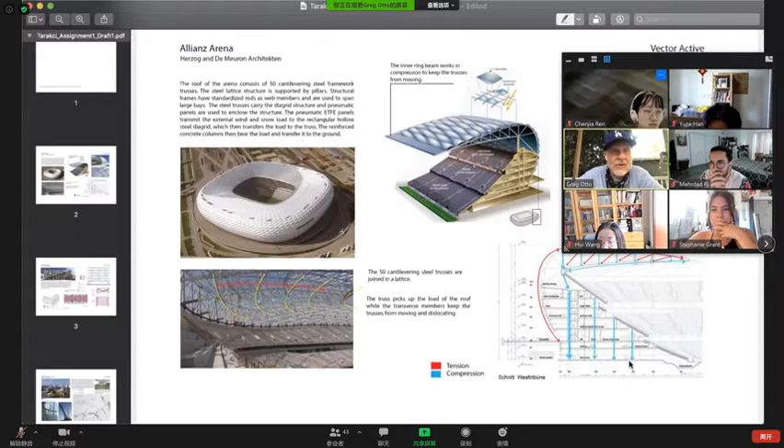Sorry about that. So this is, I think, really well done. I was looking at this right before class. Description of the structure, very clear from the written piece to the corner diagram that you've got a truss, you've got a cantilevered truss.

You see the top chord in tension. It wants to rotate around this pivot, which is effectively a ring beam that goes all the way around. And then probably what's missing in this diagram is the continuation of the trussing on this back piece to get to this back chord that wraps around. That's probably a missing piece, but nonetheless, very clear in terms of how the loads transfer into the truss.

What's also nice about this is the connection that there is circular behavior in this whole structural system, and that's represented in the yellow lines. Those rings effectively tie together. So if the tip of the truss were to deflect, and if the diagram was presented such that the tip would deflect, those hoops, the yellow lines, would effectively restrict the deflection.

So it effectively tightens up the roof structure. And we'll talk about that when we get into the next section and talk about football stadiums, that the hooping action or the ring action is a really important phenomenon that effectively helps stiffen a roof.

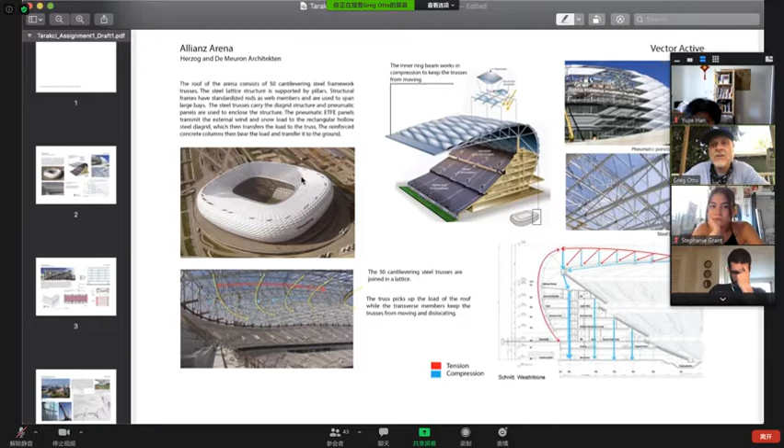So at the end they ended up with a much shallower structure. But the definition here is correct, it is a vector active structure. So that I thought that was very good.

There was another one that I wanted to show. Go ahead, please let Dagdir inside. Hang on, I see him. There he goes, thank you. Yep. Man, it does not like to pick up.

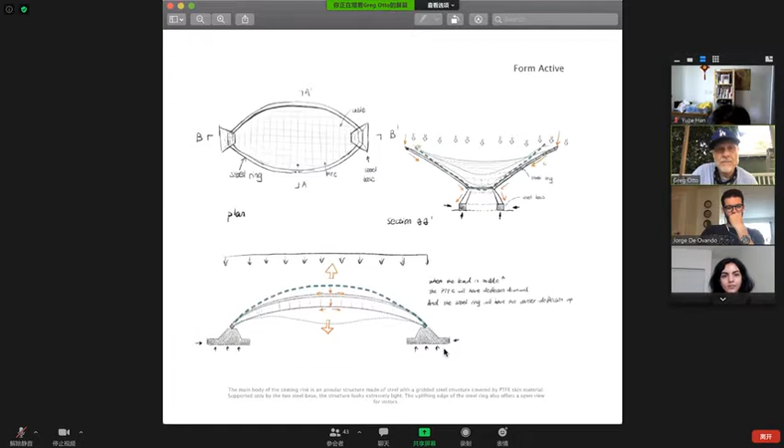All right, so does anybody want to show their project? It's the perfect opportunity to put your work up on display, and we can talk about it and see how on point or off point you are. Hopefully you're on point, but if not, this is a perfect time to catch it and correct it, because I'm going to give you one more week to touch it up based upon the work I've showed. Anybody want to give it a shot, or do you want me to call on somebody?

I can show my first project, Greg, if it's possible. Yeah, perfect, fire away. I don't know if it's very draft, but I cannot share screen from here. Only you can. Only I can. Oh, why is that? If you click the three dots configuration, you have to allow the share screen button. All participants. Perfect.

Okay, there you go. Yeah. Oh yeah. Okay. I don't know why it's not showing. No, oh. No, sorry, I don't know why it's not. The file is not in my folder. I should have to wait. Can someone else go? Yeah, who wants to go?

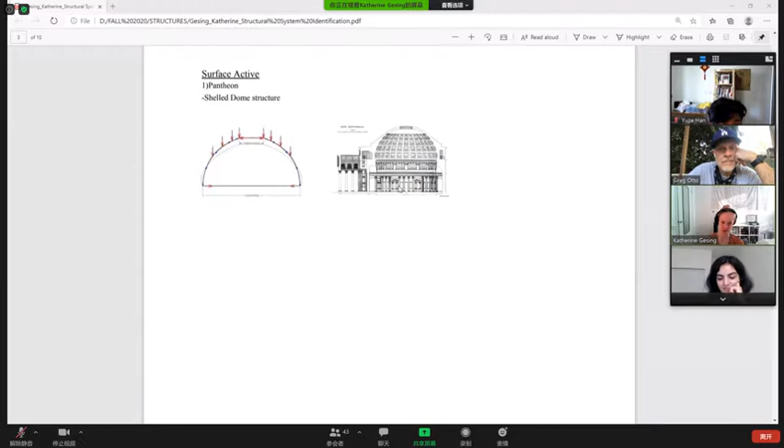I'm just trying to find one, we can just do the Pantheon, because that is a basic thing. As soon as I can share my screen... So this is, I was just looking at the Pantheon as a surface active structure, because it's a shell dome structure, one of the easier ones to comprehend for me.

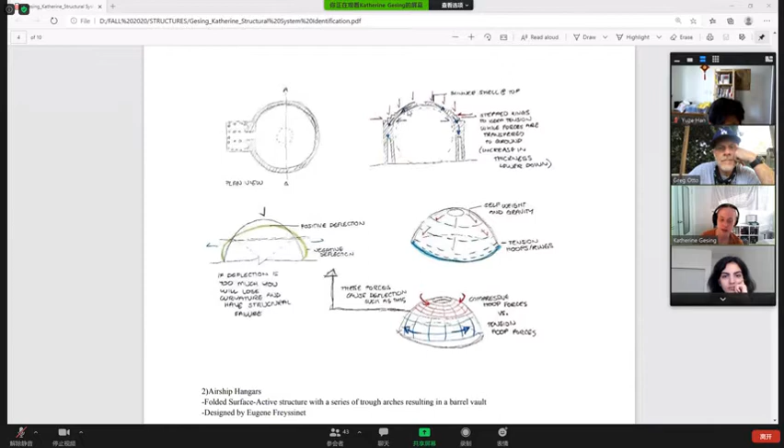And I think it's nice because the way the dome is created, it gets thinner towards the top, and the different aggregate used in the concrete is also different towards the top. But in addition, they have these stepped tension rings on the outside that are kind of like stairs, and they do that because within the dome, you get tension forces towards the bottom while it compresses at the top, and so the deflection would kind of smush it like a loaf of bread.

And since it is surface active, if the deflection is too much or you have too many external forces, it would lose the curvature and you'd have a structural failure. So yeah, I think this is great.

I think my comment would be you did exactly what I warned not to do, which is don't draw small. Because I think your explanation is actually spot on. It is absolutely 100% surface active. Your description of compression and tension in the zones is spot on, that yes, the forces build up under gravity load as you work your way down the dome, as the rings, the loading is increasing incrementally, and so in a way you've captured all of the fundamental ideas of this, but your illustrations are so small. You're tentative, you're scared to do it, but you were 100% right.

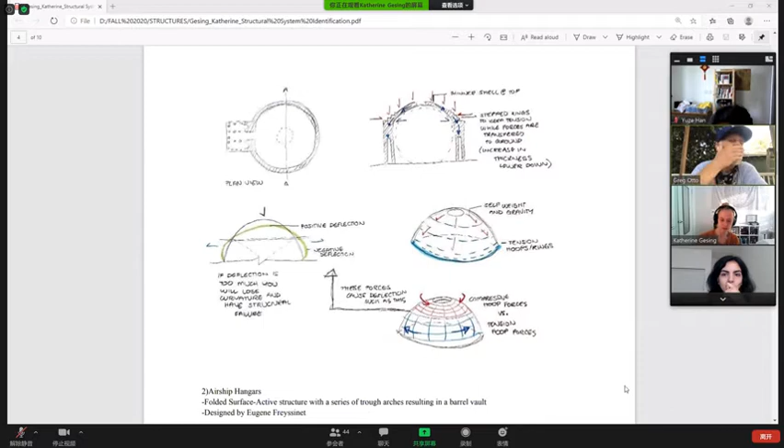And so I would encourage you to enlarge and be more confident with the sketching, because it'll also help, when it gets to more complex things, you'll become more comfortable in diagnosing what the structural system is. Okay, thank you. Austin, you want to go? Sure, I can go.

I don't know what project... I guess we'll just pick the one you're proud of, or the one you think is right. Well, I'm pretty sure this one's right. We'll go with the Beinecke library.

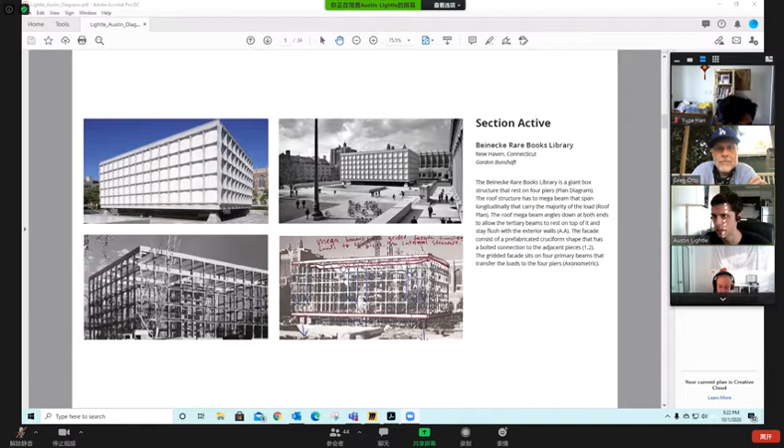It's basically a giant box structure that sits on 4 piers. It has 4 perimeter beams at the top and bottom, and then 2 mega beams that dip down in section running across the middle, so it's really all resting on these 4 piers. Looking at the roof, those 2 large beams go across the middle and drop down in section, with tertiary beams sitting on top.

The facade is made up of a prefabricated cruciform shape with pin connections that they just dropped and slid into place.

Yep, so there's a lot of things going on here. This is a great project. You're 100% correct, section active. I would say you have small sketch disease as well.

The niftiness of this is twofold. One, it's a table—it's got 4 supports in the corner, with this big table frame system that effectively creates new terra firma, which is new ground, and that's what lifts it off the ground. Then the perimeter exoskeleton system is effectively these structural spars, which is your diagram 1.2. It's cool that you caught that it's a pin connection.

If you remember, we talked a lot about the Vierendeel truss, and this is really a Vierendeel truss. What this is noting is you have rigidity at the node where a vertical and horizontal come together, and because of flexure, you get zero moment at the pin—that's the diagram. So you got there. You probably need that diagram, but you're spot on capturing the core details of this building.

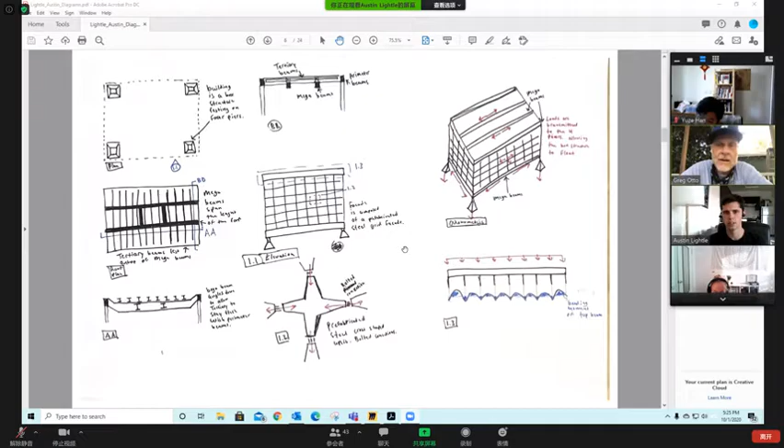So, nice one. Okay, who else wants to give it a shot? I mean, the one thing I'd say is you're missing a narrative.

Remember, I'm all for hand sketches, and I think SciArc is in desperate need of having lots of sketching, but I would also challenge you to work on your graphics and your presentation. This is a formal assignment—I'd encourage you to see this as something that also would go in your portfolio, doing case studies and evaluations, because when you get into practice, this is a big deal.

I remember speaking to Dan Seibert, a senior partner at Foster and Partners, who said that's a technique very few architecture students have these days—the ability to take projects and dissect them to understand what's going on. So I encourage you to have that in your portfolio going forward, and be thinking about these deliverables as something you're going to package up. It's important to have your studio work, but it's also important to show that you own your process, and that you have rigor around your process to develop architecture.

Okay, all right. And I have my file already, Greg. Can I go? Awesome, yep, fire away. And I have a doubt regarding the systems.

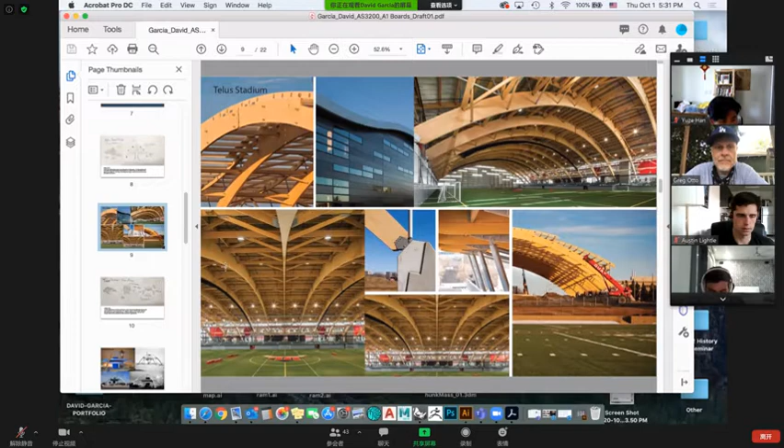Awesome, okay, what do you got here? Yeah, so this beautiful structure, by the way. Love this one, stadium, huge timber structure. This one is, of course, form active. Why? So normally a form active is a tensile structure. What makes this one unique?

It's an arch, right? Yeah, okay. So I kind of have some of the details on it. It's kind of these major arches, and then aligned with these minor beams that go across it in plan. So I kind of tried to show that the beam goes across to these anchor points and then forms like this egg form with compression inside and tension on the outside.

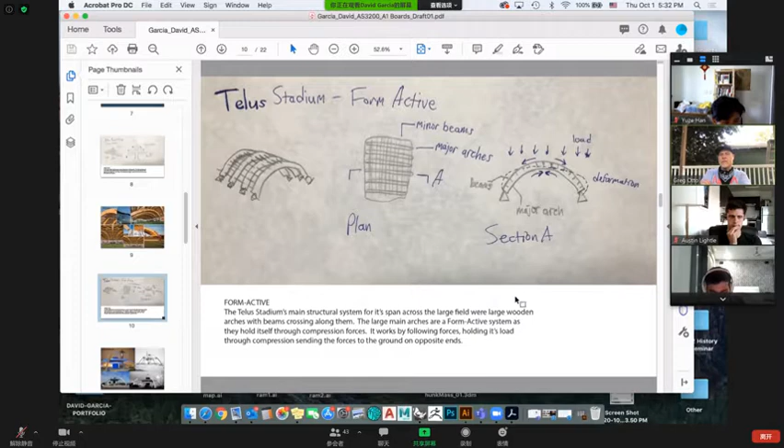One of the things about arches, and the thing you always have to be really careful about, is there's an enormous amount of force that comes out of these things because you're effectively collecting gravity forces and lateral forces, and these are getting translated effectively into compression, into the curvature, and transferring down through the arch, through the geometry, and each incremental step that compressive force increases until it hits its support.

So in your case, you're showing pinned, and that is correct. It's a pinned arch, which means at the end you get a horizontal thrust and you get a vertical thrust. Your foundation has to resist, has to push upward, and it has to push inboard, from both sides inboard. And so lots of times, in all cases, that results in very large foundations because you have very large thrust forces. And in this particular case, this is a very long span structure, that can become very, very costly.

Later in the semester, I'll talk about a project I did with Shigeru Ban, in which it's an art structure - let's just say it's a surface active structure, but the arching action, I also ended up with large thrust forces, and you can tie it. So in this particular case, if I actually took a cable and ran it under the field and tied one foundation to the other...

I could actually reduce my foundation requirements because I've tied the arch, because my force coming out of the arch should be equal and opposite. So if I tie them, if they're pushing out, I tie them so that I pull them together, I have an equal opposing force. And so that tie, the tension could be really huge, but I've basically relieved myself of having to deal with the horizontal thrust of the arch, and now I'm only dealing with the gravity component. Does that make sense to everybody?

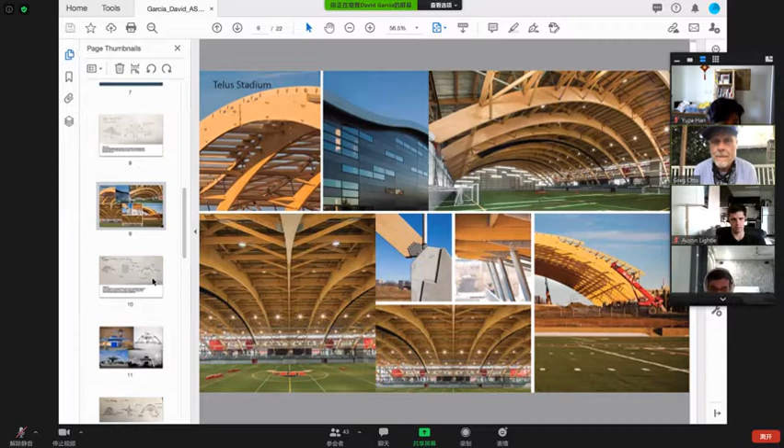Everybody with me? Yes. That's a pretty cool narrative to understand.

Okay, so I think again you probably too suffer from tiny sketch - you're missing reactions. But I think it's a great structure, and I think you have good stuff here.

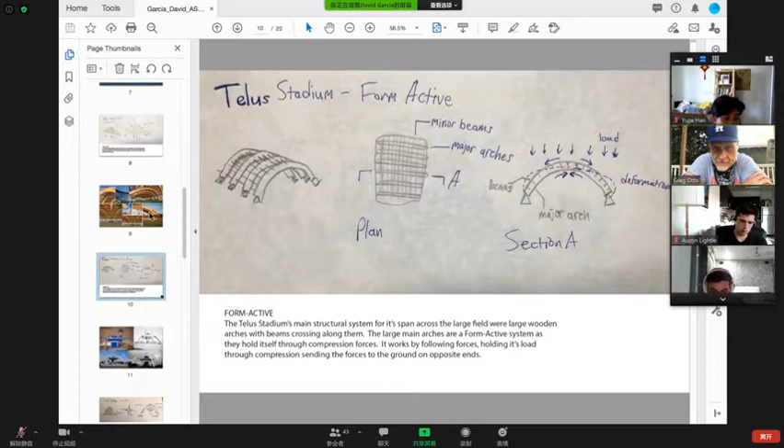Yeah, okay, okay. All right, how about we get, let's see - how about Jordan?

I only have pictures of my sketchbook. Do you want me to share that? Yeah, let's do it. Okay.

So I definitely did not do as much as everyone up until this point. But for my section active category, I did the Farnsworth House, the Glass House, and the New National Gallery by Mies, and also Philip Johnson.

Yep, so let's just talk about the Farnsworth House, right? You probably need images of the Farnsworth House as part of your package. Going back to the conversation of the Bauhaus and industrialized construction, and particularly industrialization around common components, like I-beams, etc.

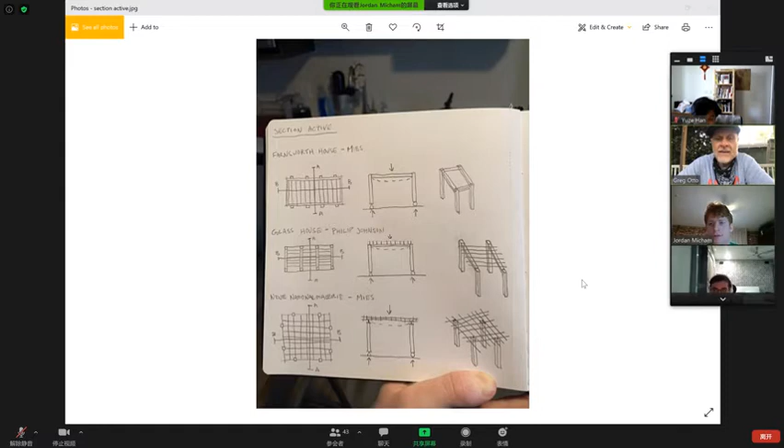Okay, yeah sure. Okay, let's see. How about Kate? Sure. Okay.

Okay, here's one that I have as form active. It's basically a glass structure that's held together by cables, and it's connected onto the existing building with the cables and on top of tubular columns.

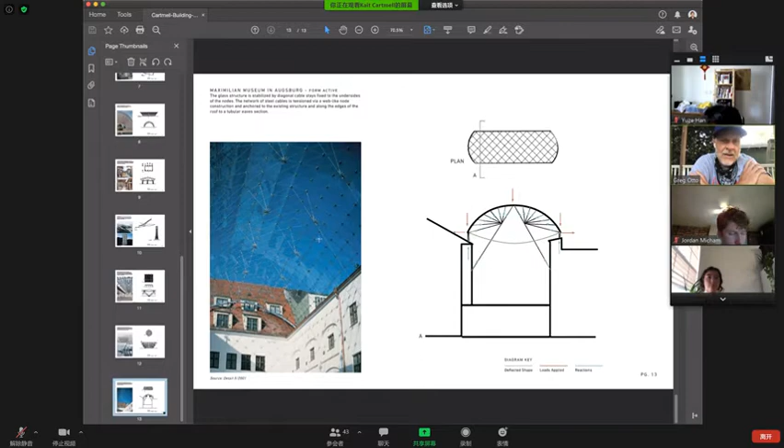Yeah, this one's an interesting one. It's a barrel vault, and I would generally agree with you that it's form active, with the exception that if that plane of glass did not exist... so if you blow up the plane of glass as a picture, you'll see there's X bracing in there — see how it's crisscrossing? See how there's X's in there?

So really, at the end of the day — and this is where you and I are going to argue, and it'll be a good argument — there ultimately is a plane of action happening, and therefore it makes it surface active. But if you do have the diagram, it is correct — the structure would fail because it literally is a bit too flat without the cable system underneath, which basically makes it a cable arch.

So there is an element of form activity in this thing, but if you only relied on form active, it would fail because you need the surface plane, and therefore it really is surface active. The giveaway — sorry for my dog — the giveaway is the X bracing between the nodes that would make it surface active, because it wants to be a shell, and that glass really is operating as a shell.

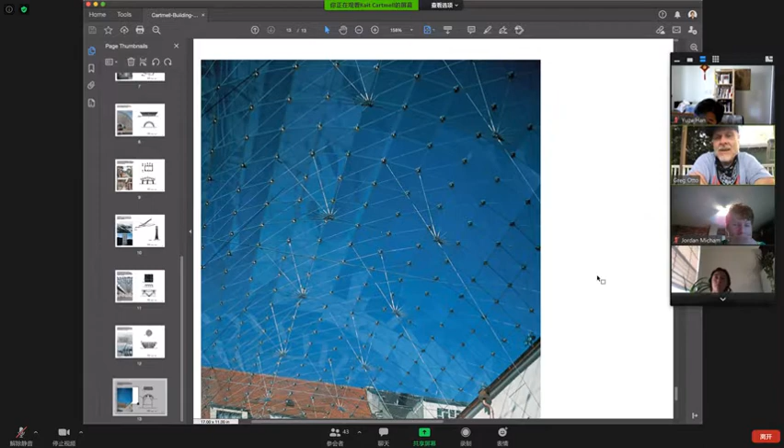Okay, make sense? Yeah, beautiful project. But this diagram is correct though. It's just — yeah, the diagram is correct.

You're effectively — so if you were to press on this thing, right, and just think about this — these are really beautiful structures. If I press on this thing, the whole thing wants to splay out, I get a thrust action out of the whole thing. But because of the cables, it prevents it from really flattening out, in a way that — the best analogy is it operates like a bicycle wheel, if that makes sense.

That's effectively what this is. It's not a complete bicycle wheel, but at the end of the day, because of how it's laid out, it works exactly like a bicycle wheel — like the spokes would never really like to be in compression. If you put the spokes in true compression, a bicycle wheel would fail.

But because they're all in tension, the whole load, because it's in a ring, is always redistributing. Even though you're sitting on it and transferring a compressive force, you're trying to smash the wheel and the ground's trying to push back up at you. Because you have a ring of tension behavior, the spoke that would be in compression can't be, because it doesn't have the capacity, and it redistributes through the system so that the spokes resisting tension actually carry the load. Does that make sense?

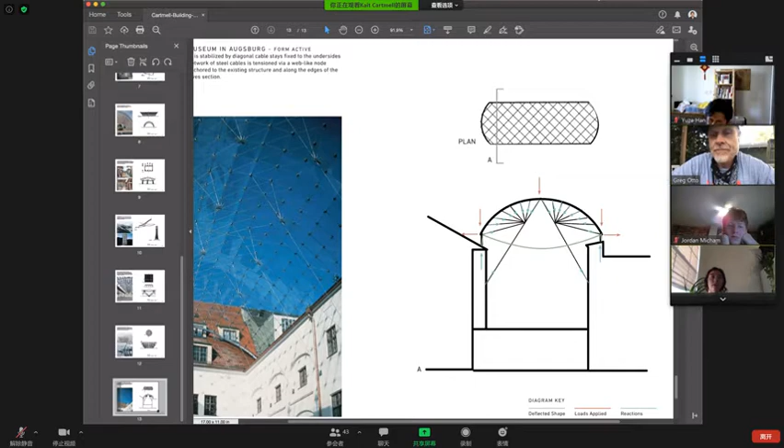Really, and that's effectively what you see here. And in this section, if we just agreed that this was the section, I would agree with you that this would be form active. But the overall stability in the system really behaves out of the barrel arch, and the form active really acts as a stiffening agent to what would be a very fragile barrel vault. Does that make sense, everybody?

Yeah, great. Wouldn't it become like a hybrid structure because of these two elements working together? Yeah, that's right, 100%, and that's why I said we could have a lot of fun arguing who's right. And in both cases, we would both be right.

And based upon her diagram, if she just said that was the structure and what I was interested in, I would agree 100%, right, it's form active. But the reality is, because this thing is actually operational as a barrel vault, it therefore is a shell. And I know it's a shell because I can see the X-ing within the glass. And so these are the really beautiful kind of conversations that you can have.

And when you see this stuff, and you can see what this did to the architecture, this thing's such a light and sophisticated structure because of the understanding of what the structure could be, right? And that's where I'm trying to get you all.

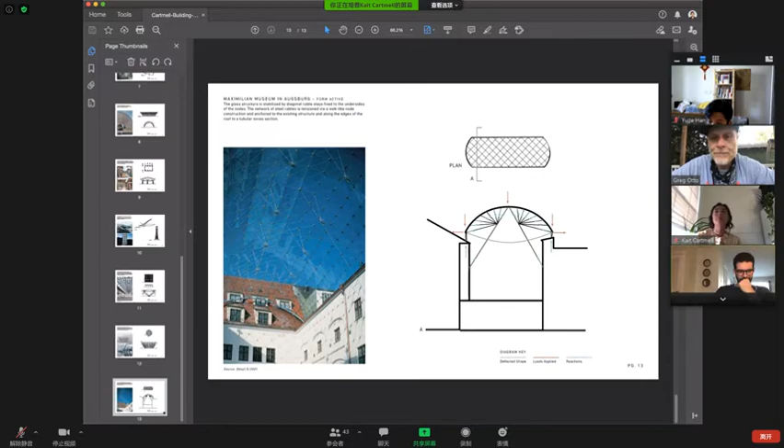So I would say you probably need a couple more diagrams to pick up the surface active component of that. But I really appreciate that project. Love those projects.

Let's see, how about Jin? Oh, it says he doesn't have a camera, so that's not going to work. How about Karl? Karl Zong.

I have a question really quick. Sorry. Yep, so far away. Are all arches considered form active? Yeah, so

the trick is this: for example, let's just pick a dumb one. The St. Louis Arch is a form active structure, and the reason being is it is only functional in the arching action in which it goes into full compression. Therefore, it's a form active structure.

If, however, you took that arch, let's say the St. Louis Arch, and we extruded it over, I don't know, a mile, that would be a surface active structure. The reason why it would be surface active is because ultimately, at the end of the day, in that length it has the potential to rack. And that racking says that it will be not only in compression under load, but it'll also experience shear in plane, and that racking, we talked about racking in the plane of the material, that's shear.

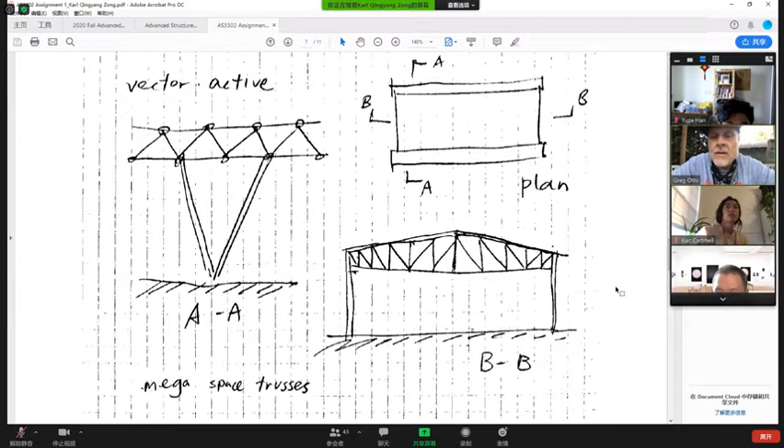I forgot to add the tensions there. There's really good documentation of this project being built, so I encourage you to get this. This is a three-dimensional space truss, so if you go back to that interior shot, you'll see the three-dimensional space truss. There's an inherent geometry to it.

There's also some niftiness in terms of the columns, right? V columns, and these too are vector active. You can see those in the background. So there's some really pretty cool stuff.

There's also some unique conditions like at this front corner. You can kind of see in the shadow lines, there's columns, which is the V column, that's kind of set back from the corner of the building. Does everybody see the corner of the building? There's this kind of stadium seating that exists there. Part of the way Rem created this corner condition, so he didn't have a corner column, was he basically carried these trusses over the top of the V column condition to create a column-free corner.

So there's a bunch of nifty vector active stuff in this building. Rem is classic for using vector active structures. There's great examples of him building very tall buildings, in which he's stacking buildings and they're effectively column free on certain floors.

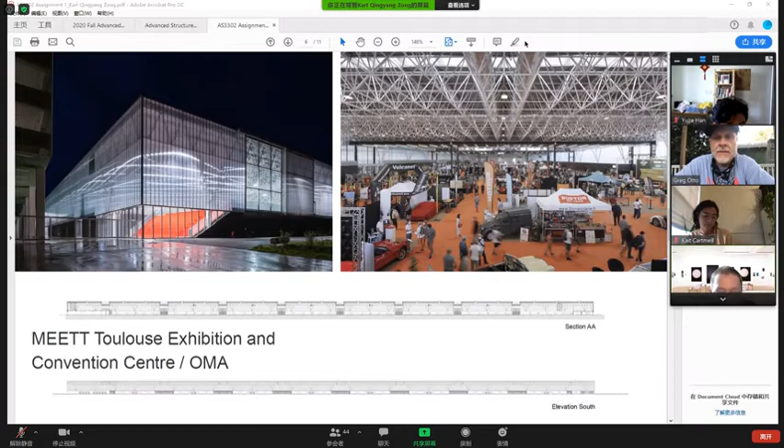All right, who else wants to go? I don't want to call on people, but somebody go. These are all great examples, and I think they're helpful to talk about, because in talking about them, hopefully it helps you better think about how you're going to use words to describe your structures and how you're diagramming. Who wants to go next? Christy, you want to go? Nobody really wants to go.

Hi. Stephanie, did you say something? Can you see my screen? Yep, gotcha.

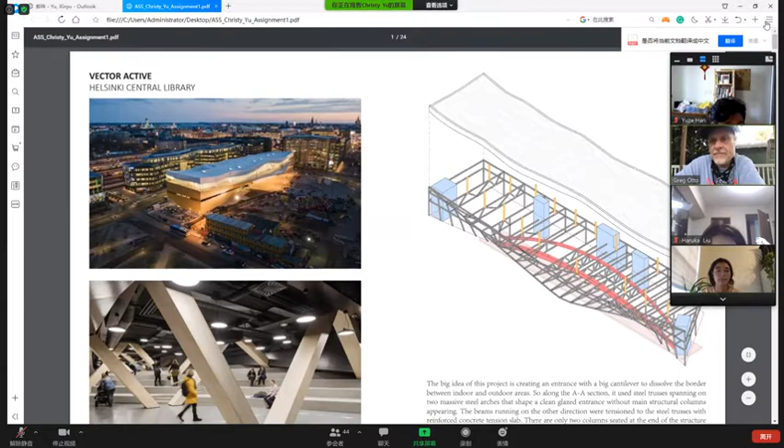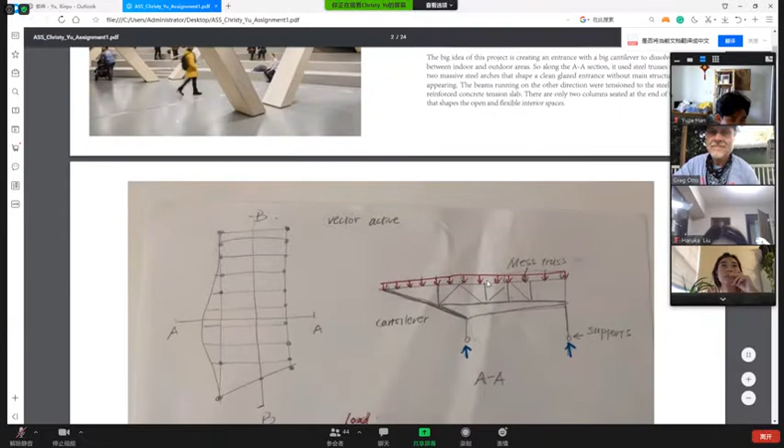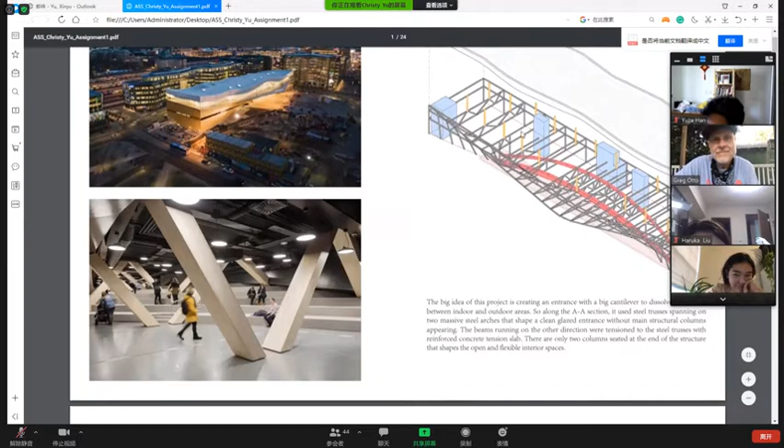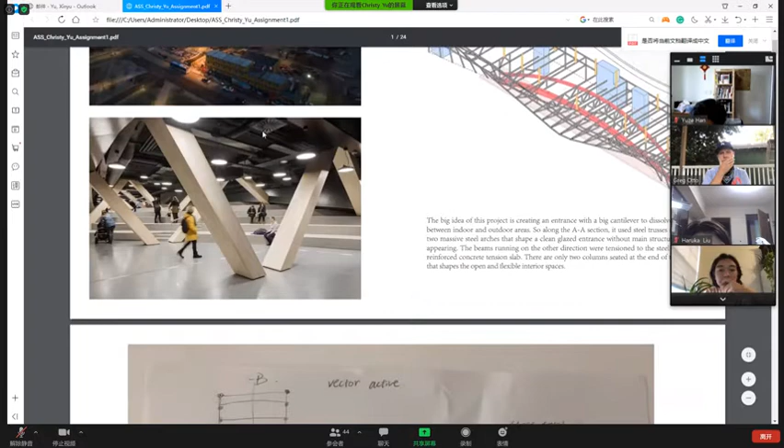Yeah, so this one, from the axon view, you could say this one's form active because it has the two arches, but I chose this section, which I would call vector active. Basically it just creates a big cantilever entrance. So it supports its main idea, having the edge of the city and the library together, and it also minimizes the supporting under these arches, which leaves the facade of the entrance mostly glazing and open.

But I had trouble thinking about how the deformation would look like, since from the BB section you can see here is the arches and there's the cantilever on top of that, but it seems like here.

Yeah, so this is an awesome project, and you'll find that more often than not, projects today no longer have the kind of purity of when Mies van der Rohe was practicing. People are interested in way more complex ideas, and therefore it tends to require multiple structural concepts.

So you're spot on, this is a really helpful diagram. I know it's not yours, but it's a great starting point. I always encourage people to start with projects that are well diagrammed, because it helps you understand how a project goes. So the big idea here is really they needed to create new terra firma, right? They needed to create a new elevation that allowed the building to have a new ground. Yeah, and that's what they did.

But they also had a limited number of points to which they could touch ground. And in lieu of just sticking props where they needed props, they really wanted a long span condition, and that's where they inserted these red arches. The arches effectively pick up transverse spanning trusses, and by changing the geometry of that transverse truss coming across the arches, they could pick up the building, and therefore have a very organic architectural form for the project.

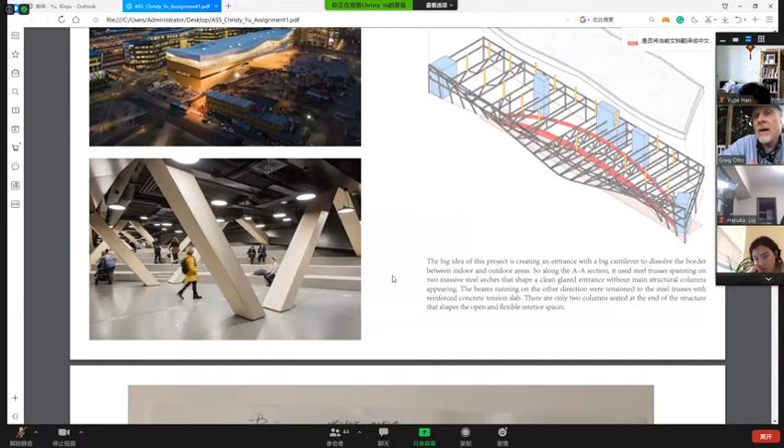Okay, so let's look at the diagram once more. You can clearly see that they're only doing the trussing where they need trussing. So where that cantilever needs to span over the arch, you see trussing, and then the trussing no longer exists as it works towards the back. Yeah, and so that's an interesting point.

The other thing is you see the yellow columns coming down, and you see how they made sure the diagonals directly correspond to a node, so that the column is always sitting on top of a node. And we talked about that - that's an important feature we always want to hit. We always want to hit a node.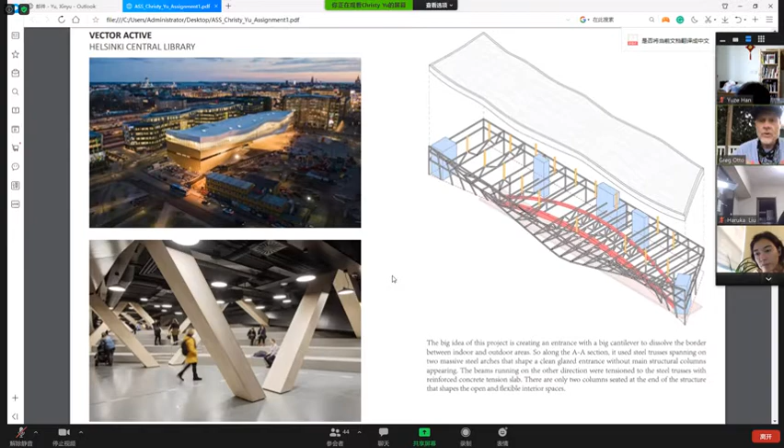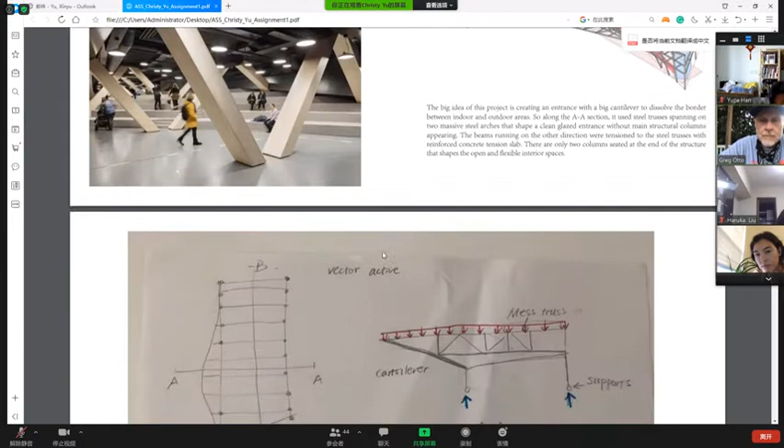Yeah, so there's some really good things to explore. So go down to your diagrams. I think what's wrong here is your point of support actually has to hit where that last diagonal is. It's not on the back side of the building. Yeah, okay, I see.

But yeah, this is a really interesting building. I think in your plan, in your upper left hand diagram, what you're missing is you've laid out effectively what your truss lines are, but you need to show where the arch comes up through, and the arch is supplementing the fact you do not have columns there. In other words, where the arch is actually supporting the truss, it effectively behaves as the support - like if there were a column there, it's behaving as the column. It's the rigid point of support for that truss. Now it'll have flexibility relative to a true column, but that's the point: I don't want to have columns there, so I'm going to drive an arch through the building and effectively eliminate those columns. Is what's going on.

Make sense? Mm-hmm. Okay, thank you. Yep. Who else wants to go?

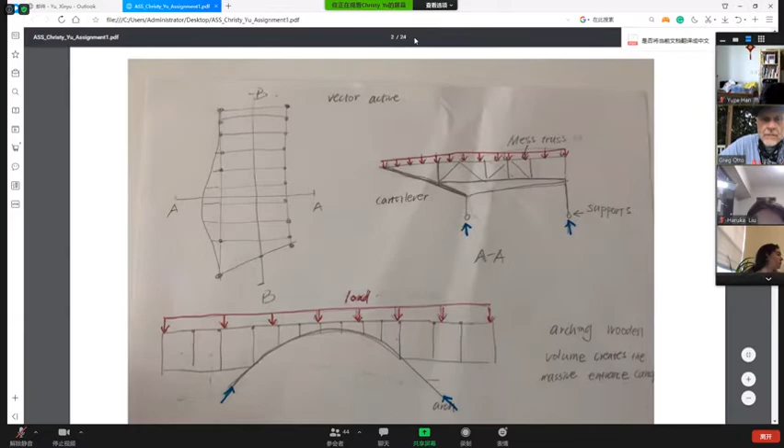Hi, it's more of a question. I want to ask, there's a building I thought is section active, but I'm not really sure if it is or not. Do you want to share your screen and let's see it? Oh yeah, I know it's really sketchy looking at other people's works, and I just really need to spend more time on the diagrams and the descriptions.

Yeah, this is the building in Beijing, the Water Cube. And I thought it's section active because the general form of it is really linear, but then the structure going through them is very hexagonal, so I was kind of wondering if it is.

Okay, so well done, it is section active. The reason why it's section active, even though it wants to look and feel like it should be vector active, like it wants to be a space frame - it is a space frame - but it truly has frame action.

Because it's not triangulated, all of the elements are experiencing bending. So because it's seeing bending, it has to be section active. And so all of those nodes, well, generally speaking, don't resolve themselves into 3 points, so you couldn't arrive at zero, and therefore I get bending.

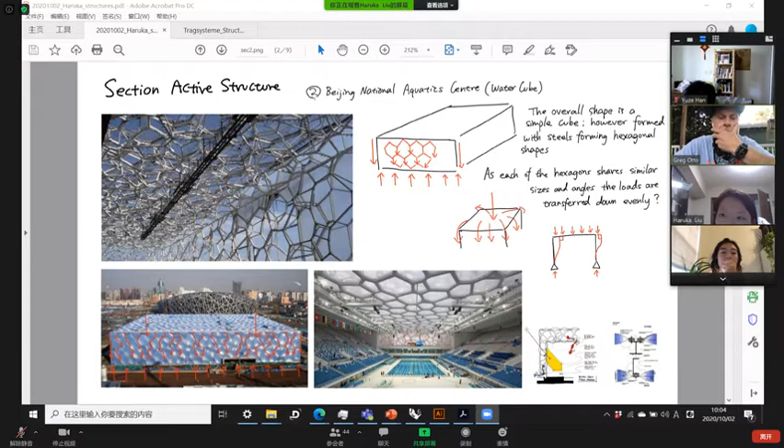Who else wants to go? I actually just have a question about Casa Mila. Sorry, my mic cut out. I'm curious about the roof, the attic in Casa Mila, because it has the catenary curves in the arches, but then it's kind of extruded along to create almost a barrel vault. But because the arches are all varying heights, it would still be a form active project, correct?

Do you have a picture? Not a very good one. Just give me a second. Just want to make sure everybody's following along. So like all of them, like it almost looks like a snake skeleton. All of these are different heights, and they're catenary curves, so it's mainly like arches, and it has these kind of buttresses next to it. But then internally it almost seems like it could be a barrel vault, but I just want to double check that this is form active.

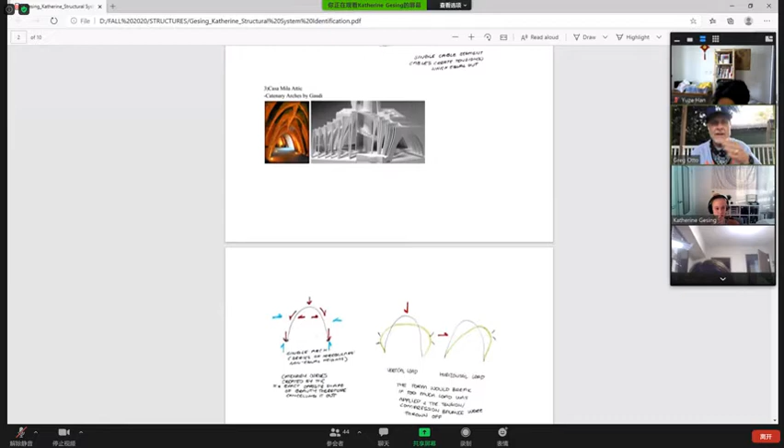What's the class think? Anybody? What do you think? Nobody wants to guess. Maybe it's form. Form, yeah, that's the way I was thinking also. So in this particular case, because you see a spine at the top and then these repeating arches of different sizes, the fact that I said arch should tell you it's form.

Okay, I just wanted to double check because the barrel vault gets kind of confusing to me, or like where it... So this is very similar to the stadium we saw earlier, in which the arch is the principal behavior, and then the spines, if you will, which is at the crown of the arch, effectively ties them all together to complete the structure.

Each one is effectively leaning on the next, but I could effectively have that leaning element, I could pin that and it would be stable, because the arch effectively is stable. Okay, thank you.

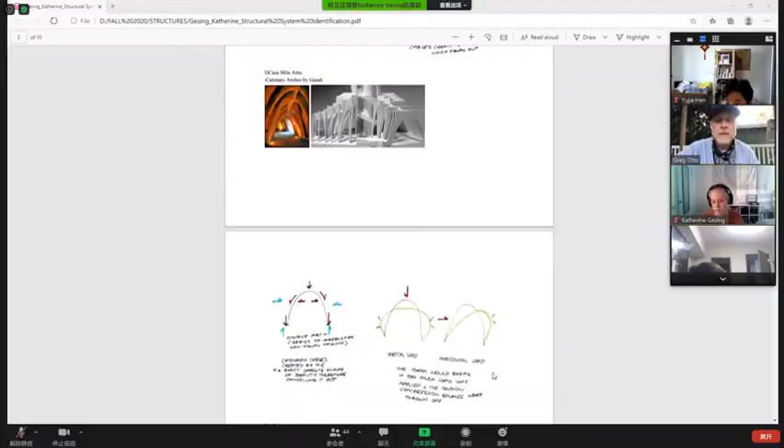Let's do one more, and then I want to re-emphasize a few things, and then talk about height systems, and then we'll be done for tonight. Who hasn't gone that wants to go, or has a project that they're super anxious about, that is terrified to show but probably should?

Anybody? May I share something? Yep. Let me share my screen. Okay, so I have the Santa Caterina Market in Barcelona, Spain.

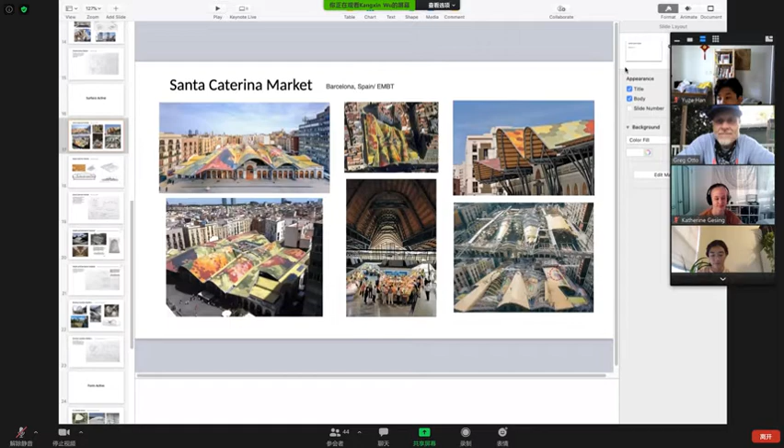For me, I think it is mostly surface active. But if you see from the section, there's something interesting because it has like a huge truss arch supporting it. So I think the, what is it?

Sorry, I think its function is that usually for the surface active part, it's kind of folded, and then at each fold you should have a column supporting it. But then this arch allows it to be suspended from the top instead of supported from the bottom, so you can have a larger span at the interior. That's what I'm guessing.

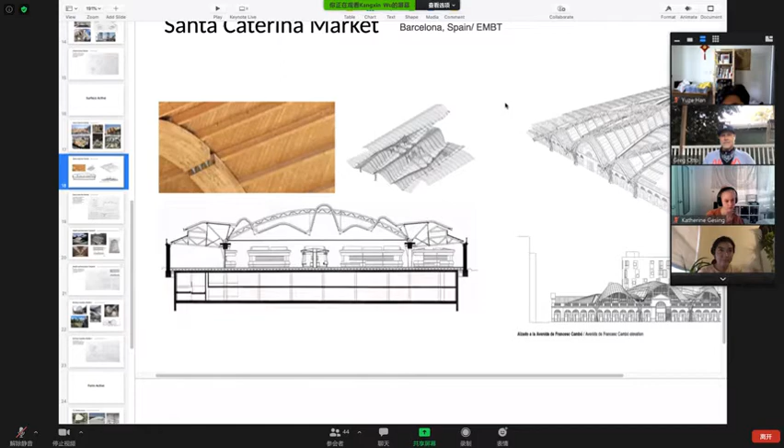Well, the arch is effectively form active that's been vectorized, right? So that's that main arch. This is a great project, and there's a lot of stuff going on.

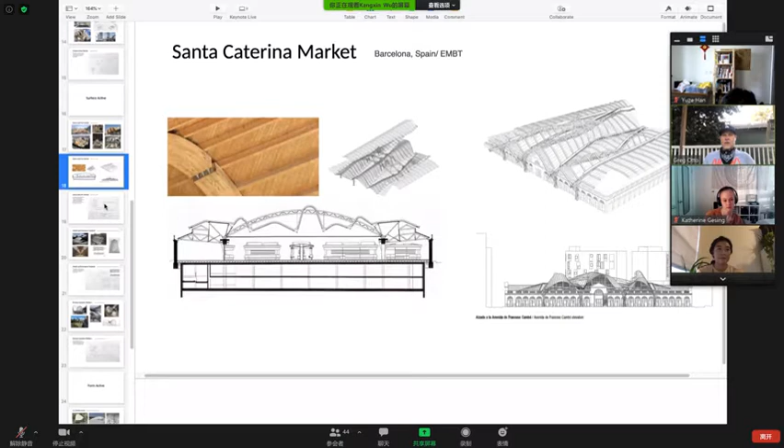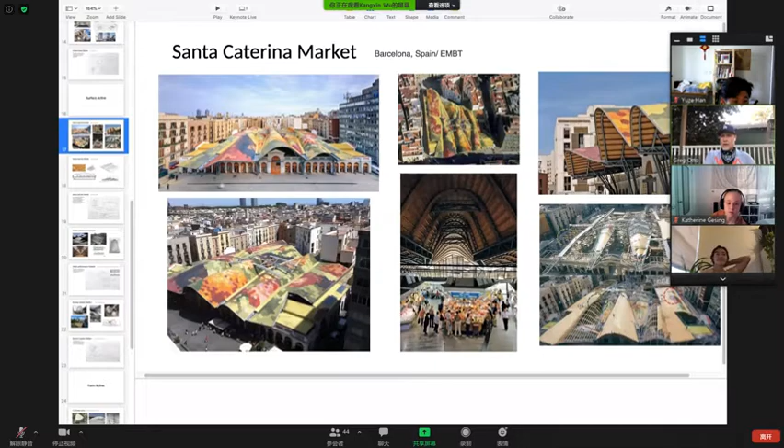Let's see, can you go back to the front elevation? Yeah, bingo, okay. So the giveaway, let's take a look at the upper right hand corner picture. You see supports, right? At the low point of effectively the vaulted roof. So you see structure coming up, and then it picks up a truss. And you see that truss effectively flying over the top, and that runs continuous, and those trusses follow the valleys, right? Agreed?

On top of those trusses, you see heavy lines which rise up from the truss, follow the geometry, and come around to the other side, which is effectively a vault, right? That's an arch, right? So I'm going to argue that this thing really is form active, and the stability between the arches is effectively the purlins, which are the ruled lines you see on the underside of that surface. And the kind of folded piece of paper that is this colorized tiled surface really is nothing more than cladding. So that is the principal behavior of this thing.

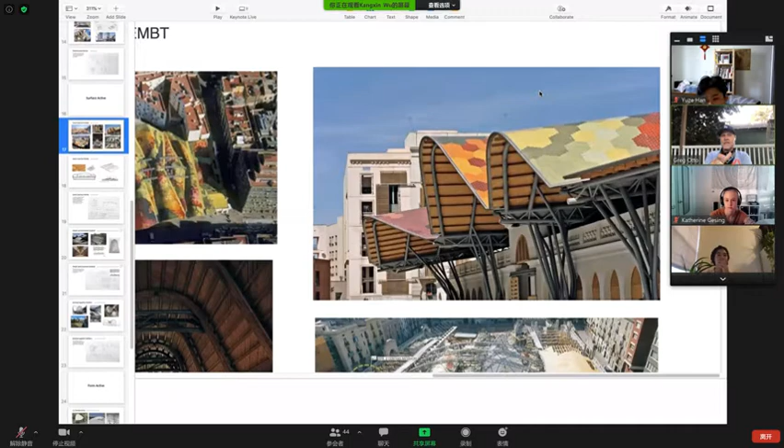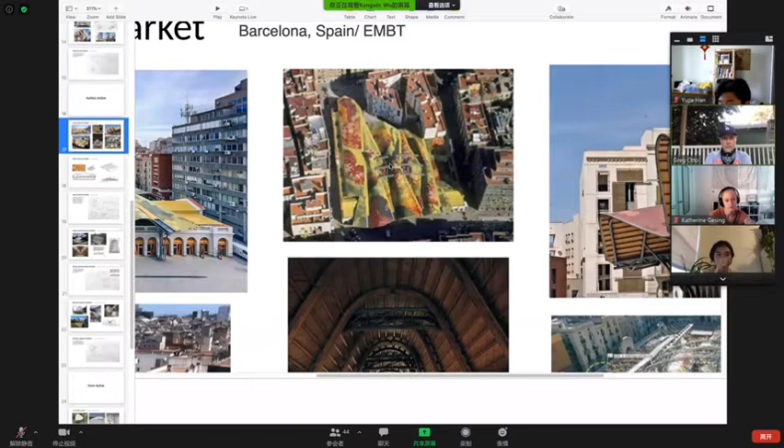Now let's take a look at the picture to the left of this image, and you see 3 trusses. You see those 3 trusses? Can you kind of point to them? Okay, now let's go to your section, or the diagram section that you had from your research. There you go. Okay, so those 3 trusses are spanning from 2 main points of support, and they are those black looking T's. See that?

So those arches are flying completely across this space. Now, there's something unique happening, and off of those main trusses, you see vertical lines that drop from the truss - right there, and also there, and on the other side - they're picking up the low point. At the low point of an arch, I've got to pick that up. I really need a column there, but in this case, they can't support a column, or a column doesn't work with the architecture. So what did they do?

They got rid of the column, and they effectively hung that point from above by a hanger. That's what those vertical lines are, and they're effectively picking up the folded roof and attaching it to the big truss. And then the big black dark line running horizontal left to right, effectively tying both T's, that is a tension cable that basically ties that arch. So remember, that arch wants to thrust out, but they don't want to have a big foundation internal to this building, right? So they only really want to take out the vertical component.

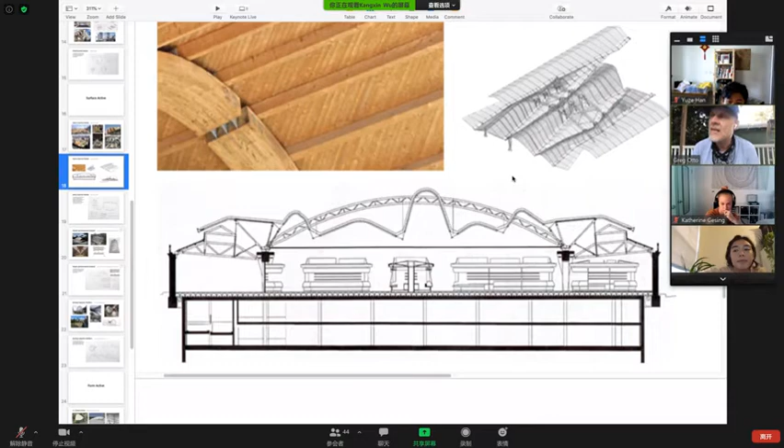So if it's composed of sticks and it has form, it's probably arch, right? That's not to say that if I triangulate it, I could be a surface active structure, and I could triangulate it and turn that into a vector active system. But in this particular case, because I gave it a formal property, I've given it an arch - it's form active.

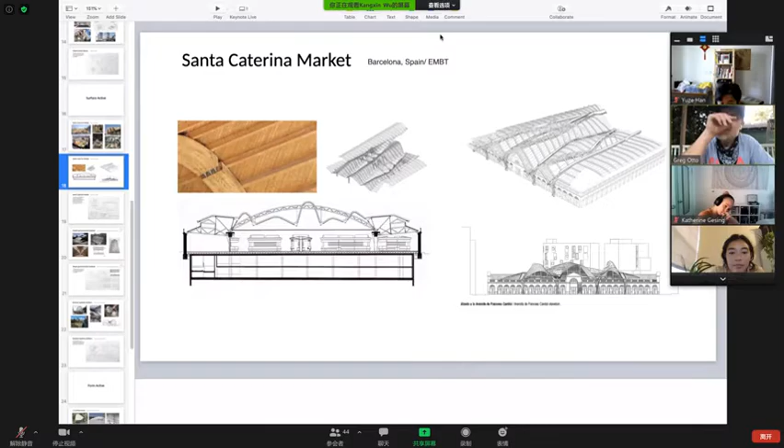Okay, I see. Cool. Okay. All right, so I think that's enough reviewing projects.

Unless anybody else wants to show their project, I really want to close on this note. I'd say there's some good work, some good thought, and some work that is not complete and certainly would not receive a positive grade at this moment in time. I think we've talked about it in a way that you should be able and capable to document your work now, so next week your assignment will be due.

I'll use these assignments that were submitted to effectively document your attendance of class today, so consider that a quiz. Yeah, you attended. If you submitted a project, you'll get some points, so that's a positive, and you get an extra week to really fine tune your project.

And again, remember, we're at a design school, and the work should reflect the quality and sophistication of a design school, right?

So let's talk once more about the things you're looking for. If it's section active, the principal behavior is it's bending, right? Bending. And the giveaway is elements will have dimension to it. There will be sizable dimension to an element experiencing bending, and the reason being is to resist bending, you need structural depth within the section. That's how you know you have a section active structure.

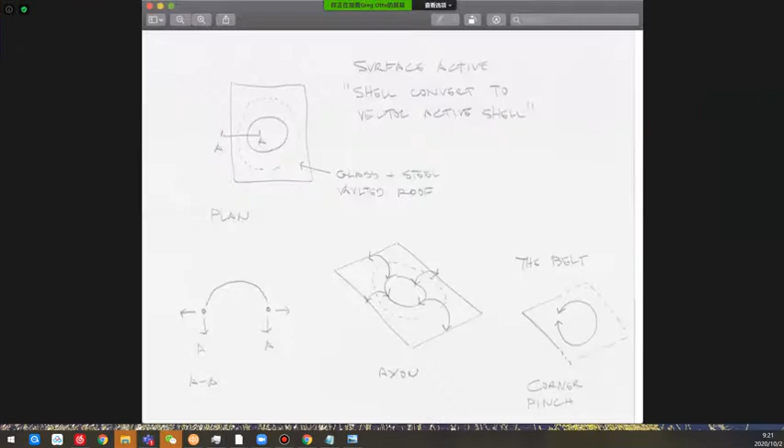Okay, so the first one was a question asked by a student about this sketch, this project. This was really talking about the British Museum.

The question was, couldn't this be form active? And it could be, if it did not rely on the surface for stability. At the end of the day, that axon image in the middle is important. So AA, yes, that's an arch. But because of the overall behavior, the dashed line that actually completes the circle effectively holds that all together.

It braces all the arches at the top, but at the bottom, at the base, that ring effectively restricts. As we talked about previously with Brunelleschi and his chain in the dome, that chain is the belt that ties all sides together and restricts the vaulted surface from splaying out. When I say splay out, if I look at that section AA, because there is no hard reaction, there's not an ability to resist that horizontal thrust.

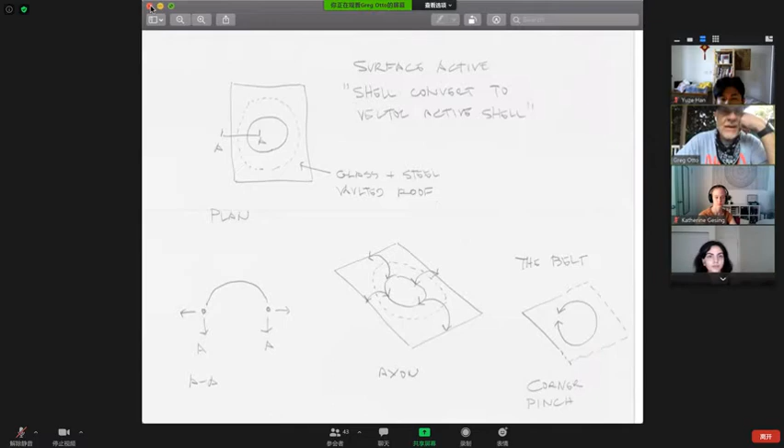Okay, I wanted to do one more. Can I ask... Do one more, which is this one. Okay, so give me a minute. Bada bing, bada boom.

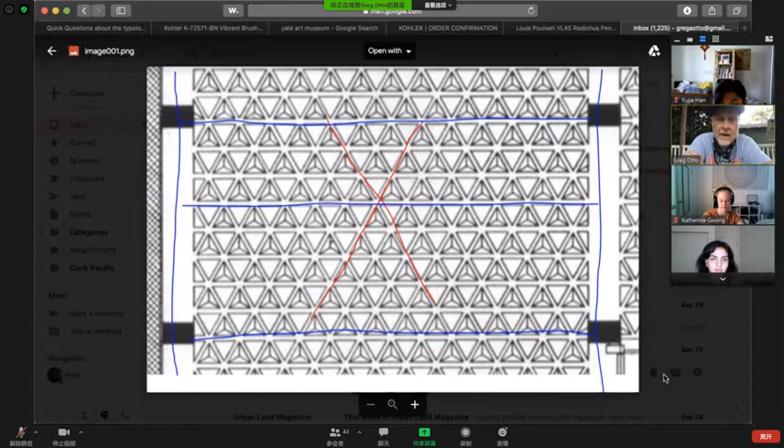Okay, so this is Yale, and the question is, is everybody familiar with the Yale Art Museum? It's got this really beautiful cast-in-place slab structure, and you're looking at the underside of the slab.

I guess I could see if I have a picture of it. Let's see if I can find a picture of that. Give me a second. It would be awesome to see that. Yale Art Museum. Images. Bingo. Okay, so let me share. Tell you what, my hand hurts from chasing the share button. Okay, can everybody see the pictures?

Yeah, okay, so really beautiful, right? This is a slab, and it's a long span slab system. The question was, because this is triangulated geometry, at least what you're seeing in that plane is triangulated geometry, is this a vector active structure?

And the answer is, it depends on what you're trying to evaluate. If we were evaluating a diaphragm, yes, it would be a vector active system, but we're not looking at the diaphragm. We're actually looking at the gravity system, the slab system specifically. In that case, it is all about depth, and there's depth here, so it has to be a section active structure.

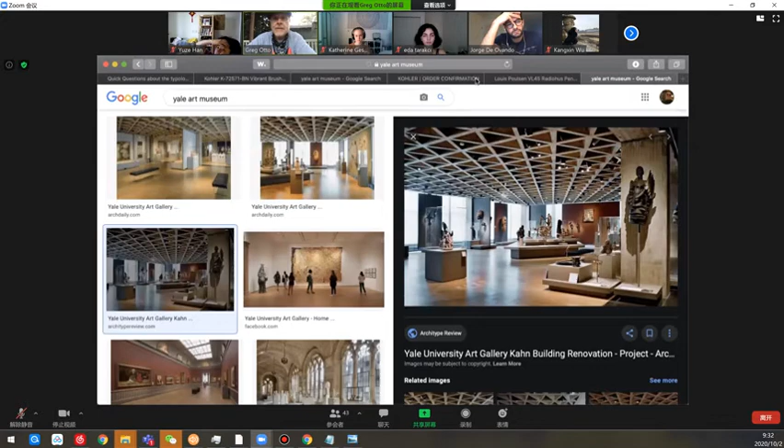Again, I talked about that floor as a diaphragm, and that being a vector active diaphragm structure. So what do I mean by a diaphragm? Does anybody know? Okay, so think of it this way.

When wind or seismic is applied - I'll pick wind because seismic is the reverse - let's just take wind. So a facade system, the face of the building, the elevation of a building, wind is applied, wind is blowing on that face. And that facade is spanning vertically between floor plates, we agree? So I get a reaction, that horizontal reaction, that's going to get loaded into the slab edge. Does it make sense?

Yeah, okay. So let me take the analogy of a shear wall building. I'm going to have shear walls on both ends of the building. Let's say there's a shear wall, it's a four-sided building in plan, I have a shear wall on each side. Okay, wind blows, right? Wind blows on, let's call it face A. It's a symmetric building, square in plan, shear walls on four sides. Wind blows on side A, and this building has side A, side B, side C, and side D.

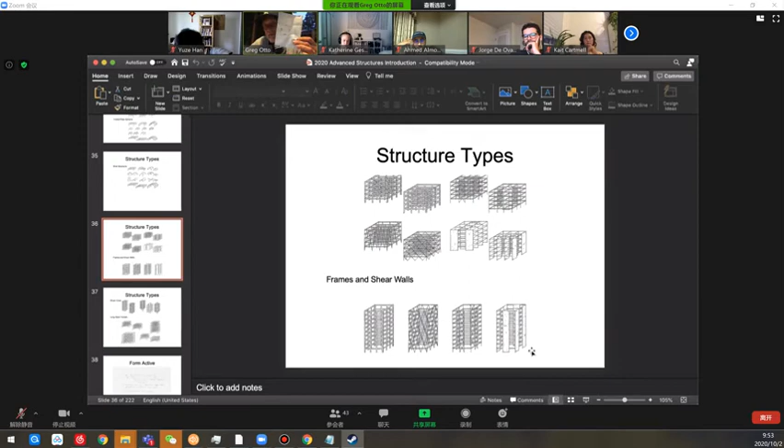Okay. Any questions on what I talked about? We'll go back over this next class, but I wanted to at least introduce these concepts. Yeah, questions?

With the diaphragm, the scenario you brought up was 4 shear walls at 2 opposite ends. What are the cases if there was only 2 sides? Is that a case where it would be like that? It would be, but you couldn't do a case with shear walls on only 2 sides because you wouldn't have a lateral system in the other direction. So that wouldn't be possible.

But let's take the case of a center core shear wall. So I'm in plan, right? And we all agreed that we understand how wind gets applied from a facade point of view. The slab edge is loaded. So now in this particular case, my slab is going to deflect as a set of cantilevers.

See how I drew those lines? The edges are not supported. The center is rigid because my rigid structure, the resisting elements, are the walls running in the opposing direction of the wind. The slab is effectively spanning up and over that core. And so effectively the edge wants to deform, and that's what that diagram is showing.